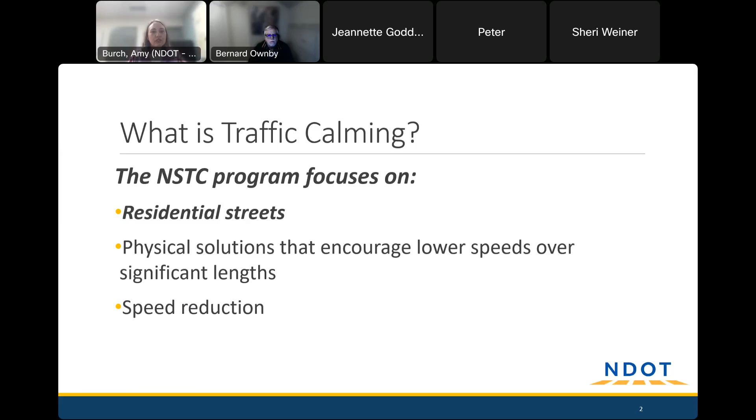But let's get started. All right, so just some background on what traffic calming is, but these are physical solutions. You've probably experienced them elsewhere in Nashville by now, because we've installed several different types of projects in Nashville, but our goal is to reduce speeding on residential streets through this program.

And the 3 E's of traffic calming. We talk about education, this being part of our education of the public on what traffic calming is and reasons to drive slower. Enforcement, that's the job that the police department does. We know they can't be monitoring all residential streets and all the other streets in Nashville 24/7. So that's how the engineering comes into this traffic calming program. And that's really what NDOT focuses on, is the engineering of the street and how do we modify the street to encourage slower speeds.

I'm showing an infographic here, and it's showing the correlation between a vehicle speed and a pedestrian's chance of surviving a crash. And so the left side is showing at 25 miles per hour, a pedestrian has an 89% chance of survival. But as that speed goes up to 35 miles per hour, the survival rate goes down to 68%. And then at 45 miles per hour, the chance of survival for a pedestrian goes down to 35%. So we're trying to reduce instances where we have speeding and pedestrians on the street through this program and slowing drivers down.

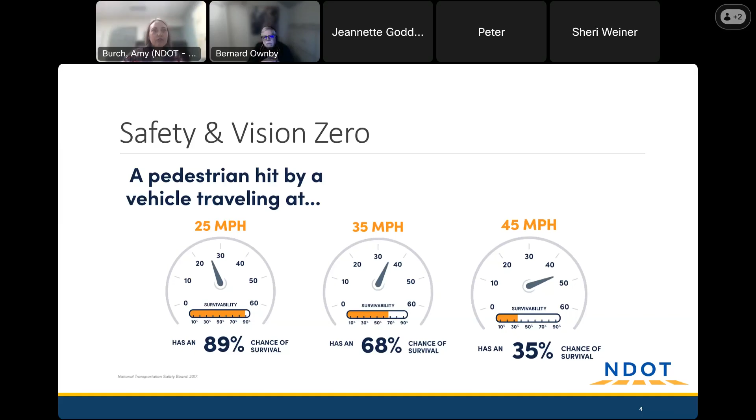So I want to show you just kind of a snapshot of the program and the demand of this program. It's very popular for NDOT. And so as of last year, we had over 480 neighborhood streets that had applied. That number has increased. And then in the fall selection, which was the selection that Harpeth Bend was selected, we had 25 neighborhood streets selected out of those 480.

And this map is just kind of showing lines on the county map of where we've received applications or where they are in the program. And this is a live map on NDOT's website. You can click on those streets and see where they are in the program, whether it's in the completion phase or an application's been submitted but not selected, and so forth.

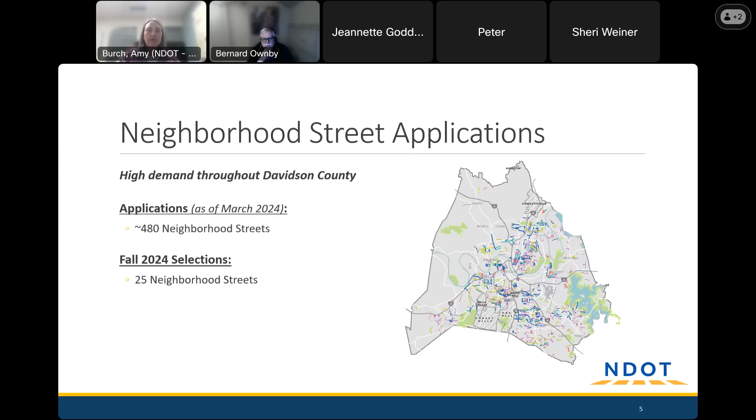Now, outside the traffic calming program, we always like to direct people to the hub. It's a really great tool that Metro government has, and it's a way to submit needs and services to Metro government, so that the service request gets to the right department. So if you have a clogged drain that's causing flooding in your yard, you can put that into the hub and it gets directed to the right people at, say, Metro Water Services to get that corrected.

It's all sorts of things like street lights are out, sign's been knocked down, the traffic signal is not working. All those things are great to put into the hub to get a quick response. And it's call 311 or hub.Nashville.gov.

All right, so back to traffic calming and our prioritization, because I told you we have a great demand for this program, a lot of interest in the program and applications. And so how do we determine which streets have the greatest need and are selected in our selection rounds? And that is through this prioritization, where we have five criteria that we look at, and this is a data-driven process. So we go out and collect data on the streets, and we rank those streets.

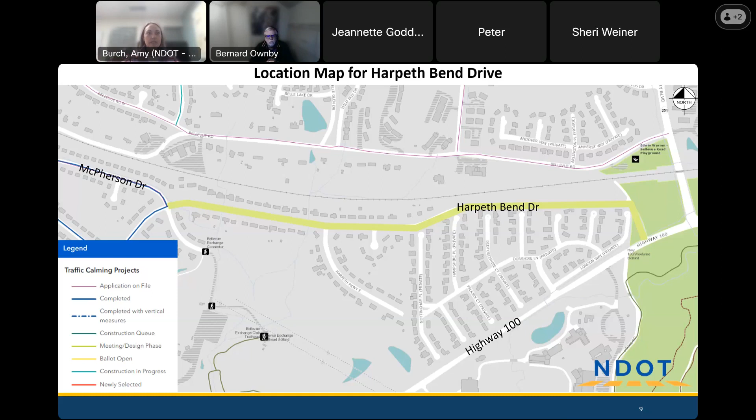Now, this is just a map showing the extent of our project. So it's between Highway 100 over on the right side of the page to McPherson Drive to the left, which is already sort of part of a traffic calming project with the traffic circles that were installed a few years back, I think maybe 2019 or so. And so this legend here, it's from our online tracker map, showing the stages of the traffic calming program that streets are in. So you see nearby, I think this is Bellevue Road up here to the north. It has an application on file, but it hasn't been selected yet. So anyway, this is our project limits.

Now we're going to talk about our toolkit. Speed cushions are the tool we use the most often. They are the most effective and easy to implement. And a lot of times we think that when people apply for the traffic calming program, they are thinking of these speed cushions to be installed on their street. But we do have some other tools in our toolbox I'll go over as well.

But you've probably experienced these. They are rubberized devices that are installed into the pavement. One of the benefits of them is that they allow different configurations that allow these gaps between the cushions so that emergency vehicles have less impact to their response time. So that is one of the primary reasons why NDOT likes to use these as a traffic calming tool.

So they do have markings on them that should have some reflectivity, but may not be. We heard from a council member that some may be having a hard time seeing them, so we'll look into that. But we also pair them with warning signage that you'll see in the picture in the top left-hand side. So we'll pair those directly with the cushions usually, or just in advance of the cushions, to make sure that drivers know that they are approaching the device.

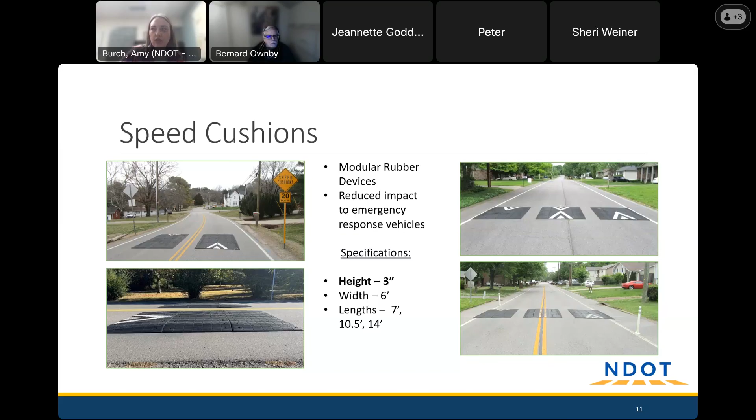And the last thing I'll say about these is that we are paying attention to other characteristics of the street, like whether there are driveways. We're not going to put them right at the back of a driveway. We want to make sure that people, as they're driving on the street and turning in and out of their driveways, are not having to go over them sideways. And then we can't put them on really steep grades or in sharp curves. So those things come into play when we're laying out a plan.

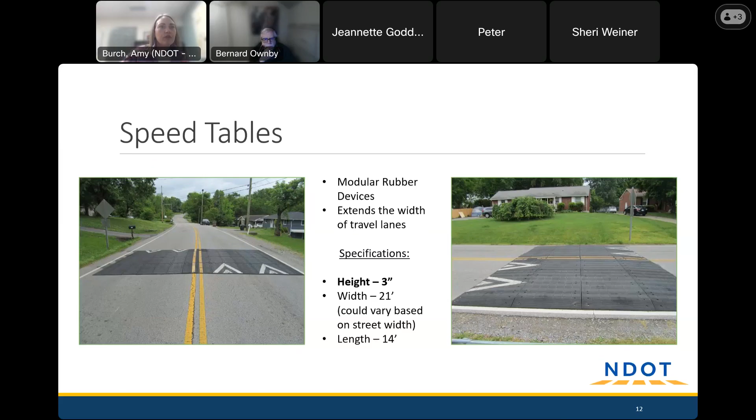Speed tables are very similar to speed cushions in the material and how they operate, but you'll see that there are not the gaps between the devices. It's one solid hump across the width of the street. We don't use these as often, but they operate similarly. So NDOT has done some before and after studies of these vertical traffic devices, speed cushions installed. And so I just want to show some before and after of the average speed.

On the left, the before speeds were on average 31 miles per hour. And then after the install, that went down to 22 miles per hour. And then the graph on the right is the 85th percentile speed comparison. And so that went from 37 miles per hour on average to 25 miles per hour on average on streets where vertical devices were installed. So as you can see, we think these are very effective.

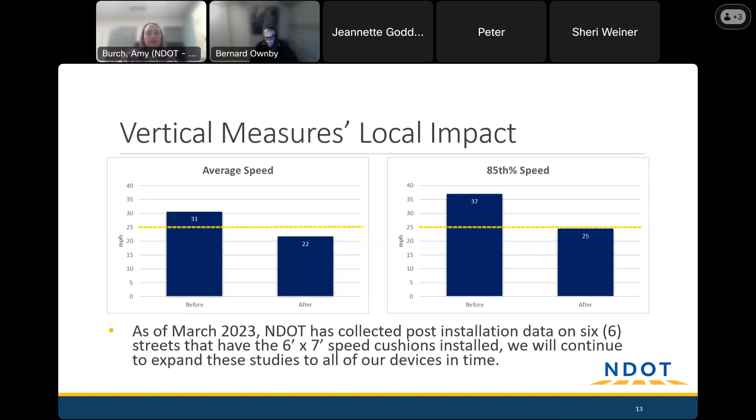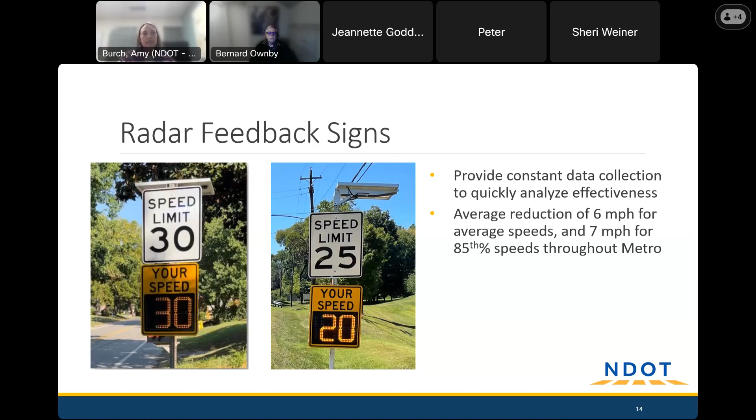We also use radar feedback signs for traffic calming projects. And these are just like you see in these pictures. They're posted with the speed limit sign usually, and they will flash a driver's speed at them as they approach the sign. The signs let a driver know if they're going over the speed limit. These have also been effective. And we'll often use these on streets that maybe did not want vertical devices installed, or where the conditions of the street don't allow for vertical devices like speed cushions to be installed.

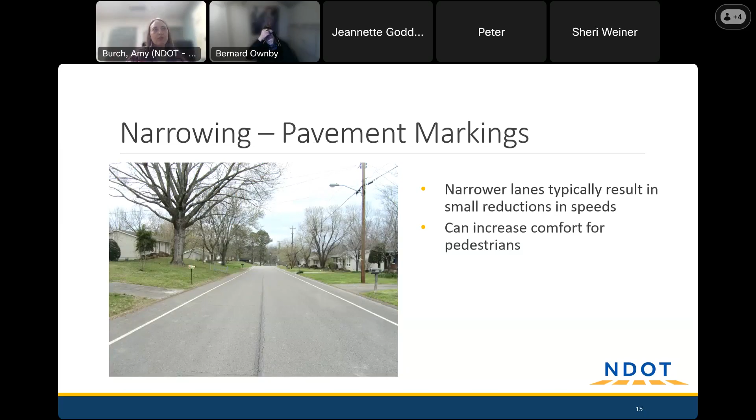But we have to have the right street to incorporate something like that. Your street already has striping on it. Then bulb outs: these are used with paint and the flexible delineators to narrow crossing distances on streets and tighten the radiuses at intersections to slow down turning movements at intersections. These are kind of more of an urban installation.

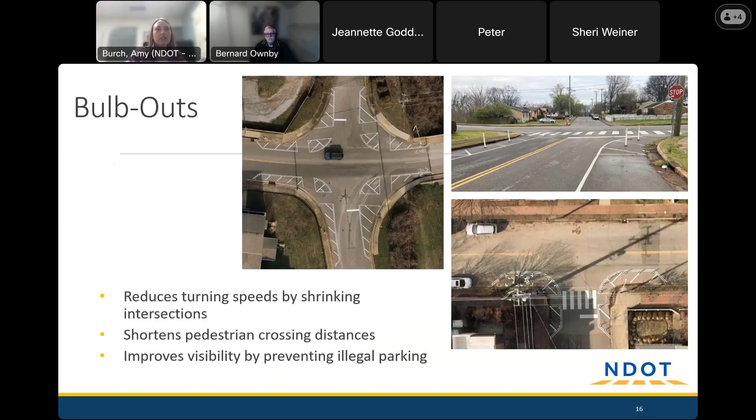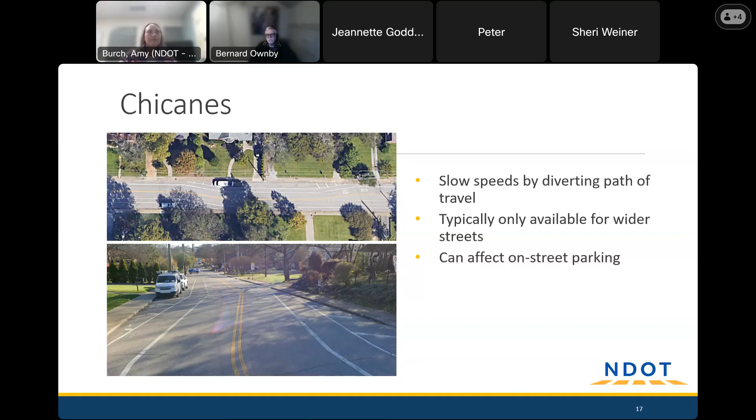And then chicanes is another tool that we use not very frequently. We have to have all the right instances for something like this to work, the right street width, but essentially it adds some horizontal deflection to the street, like some curvature, to slow drivers through an otherwise straight street. So these pictures are essentially alternating on-street parking from side to side of the street through striping to get that effect.

And traffic circles, you're probably really familiar with traffic circles, as there are some on Harpeth Bend. They're like mini roundabouts, essentially. I won't go into too much detail, but they are really used at really wide intersections where we have that kind of area to cover, and the circles and the islands in the middle of the intersection cause that horizontal deflection, so cars can slow down as they navigate through an intersection.

All right, so I'm going to jump into our concept plan that we have put together. As I said in the beginning, this is intended to be a starting place, a conversation about what we could do on Harpeth Bend Drive, but we've taken a look at it and we think that it's a good candidate for speed cushions to be installed. So that's how we've laid it out. It's 8 sets over the length of the segment that this project is for. So basically between Highway 100 and McPherson Drive, they're spaced at around 530 feet.

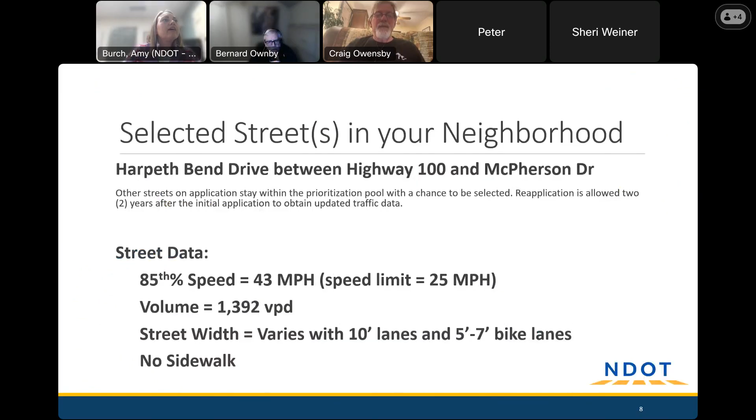Let me see. I didn't know that. It's a new fact. Thank you. Yeah, 1392. So that's both directions. So it's half in each direction roughly. Yeah, we don't get the drive-through traffic that they do, but we do get an occasional speeding car, but not nearly as many as McPherson. Thank you. You're welcome.

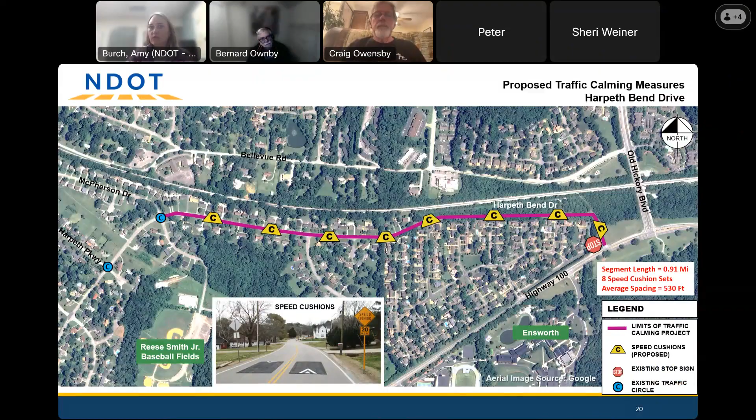Okay. Well, I'm gonna move on and we can come back and talk about this if we need to, but I want to be respectful of your time. And so I'm showing here our program flow chart, where we are in the program, how we get to a constructed project. We started with an application. There are 2 application windows per year. There were applications received for Harpeth Bend, and it went through our prioritization process and was selected in the fall of 2024. We had a little trouble getting the meeting scheduled, but now we've got it scheduled, and so we're having that meeting now.

And so this is, like I said, we give the overview of the project and the program. And now what we will do is go and do a more detailed design plan. So on that plan, we'll have the exact measurements of where the cushions or the tables are located, with dimensions and so forth, so that both the neighborhood that's going to be looking at the plan as well as the contractor, if it gets constructed, knows exactly where to install the cushions. So we would do that work.

And then from there, we can go into the online balloting phase of the program, unless we need to have a second meeting. If there's any reason, like we need to drastically change the plan from what we've already presented, we would certainly be open to having a second meeting, or if we have super low turnout and need a second meeting, we can do that. But a lot of our streets, the concept is pretty in line with what the neighborhood was wanting. And to move the process forward a little faster, we can go from that design to the online ballot phase. This is the phase where NDOT gets that input from the property owners on the street that the project is desired. And I have some slides specific about that process.

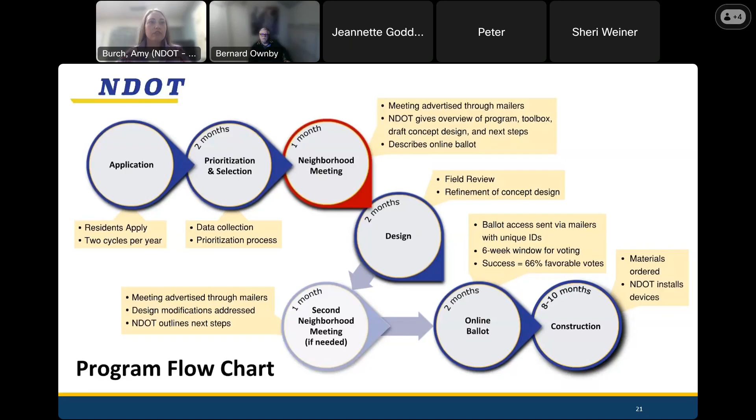And then from the ballot, we move into construction, which is if the ballot is approved by the neighborhood, essentially, then NDOT orders the materials and gets that work going. And that process is about 8 to 10 months after the ballot closes. So we've still got several more months to get this to installation if it's approved. So I'm going to talk about the balloting. What we do is we send postcards out, similar to the postcards that were sent, to the property owners on the street.

And that gives access to this online ballot through a QR code. There are unique IDs on each of the postcards that are associated with the addresses. That helps us make sure that we're not getting duplicate votes or votes from people that don't live on the street. And then that balloting time period is open for 6 weeks. Respondents have the ability to vote yes or no for the project, and if 66% of the respondents vote yes, then the project moves forward.